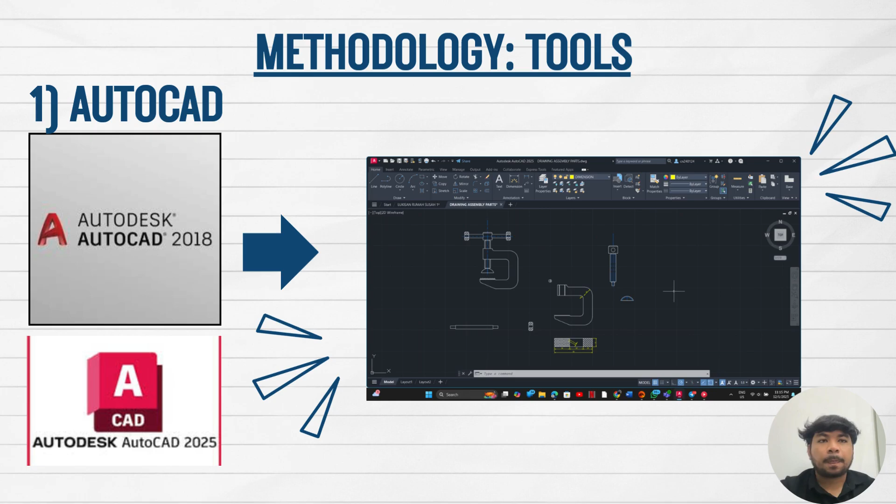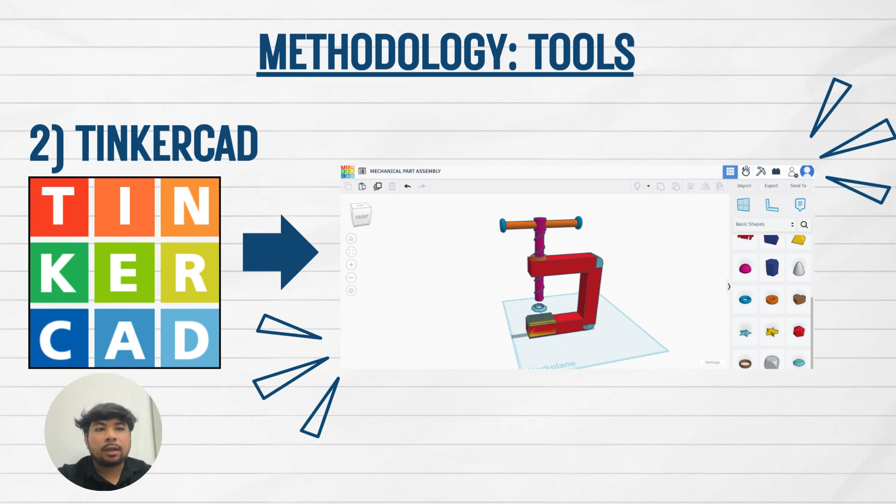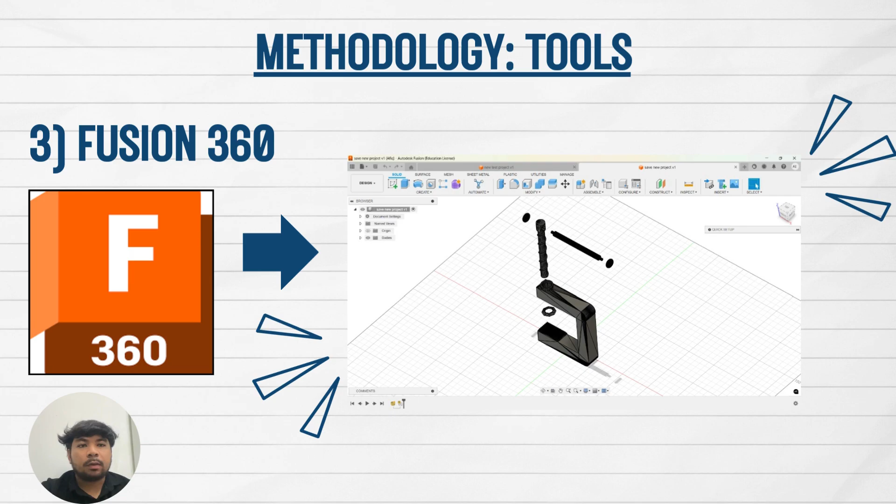Hi everyone, my name is Chan Eun Yong and my matrix number is AN240014. Now I'm going to talk about the components in our drawing.

First, the component is spacer. We used a quantity of two for this, and the material is steel NB 1020. First, we drew the 2D for the spacer and converted it into 3D, and this is much easier for us to convert because we did the 2D drawing first, then converted to 3D.

The function of the spacer is: first, alignment and separation; second, load distribution; third, smooth movement; fourth, prevention of over-tightening; fifth, compensation for manufacturing tolerance. Then for the orthographic drawing, we used third angle projection for this.

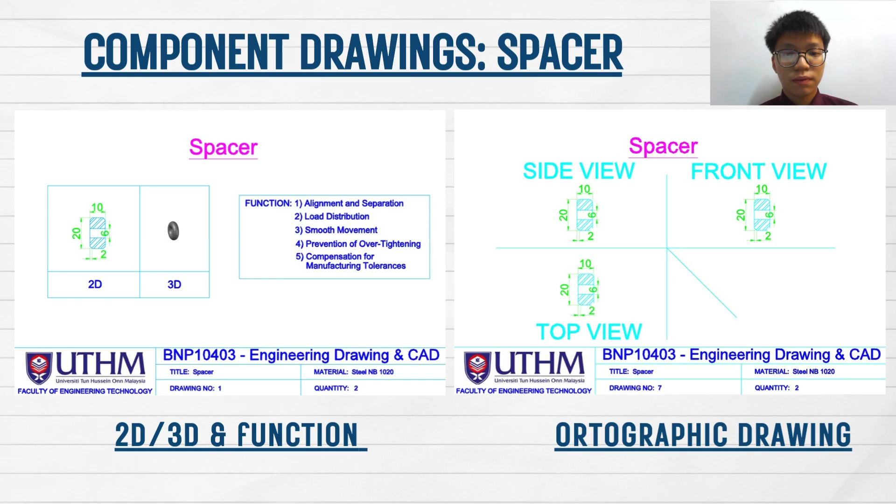The second component we used in our drawing is the handle. We used one quantity for this, and the material is steel NB 1020. We also drew 2D and 3D for this. First we drew the 2D, then it was easier for us to convert to 3D. The function of the handle is, first, operation control; second, mechanical advantage; third, adjustment; fourth, safety and ergonomics. For the orthographic drawing, we also used third angle for this.

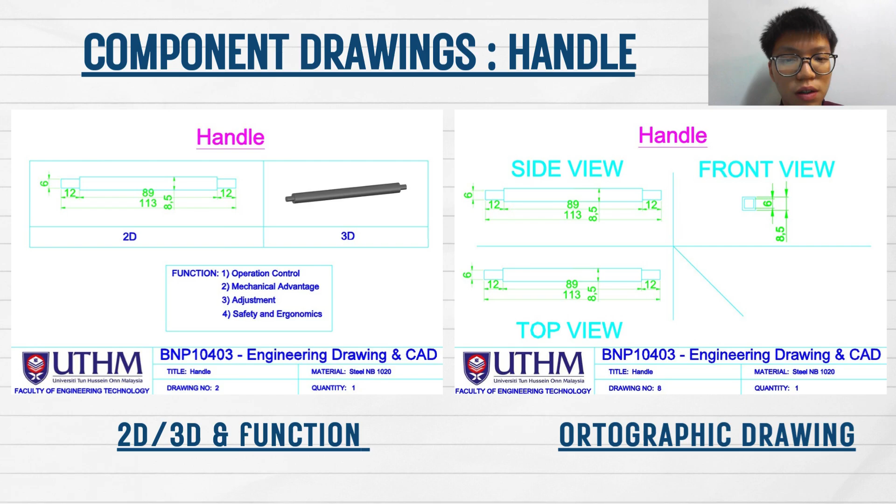The third component we used in our drawing is the screw. We used one quantity for this, and the material is steel NB 1020. First we drew the 2D picture of the screw, then we converted the 2D into 3D. The function of the screw is, first, clamping mechanism; second, force multiplication; third, precision adjustment; fourth, durability and strength; fifth, locking ability. For the orthographic drawing, we used third angle for this.

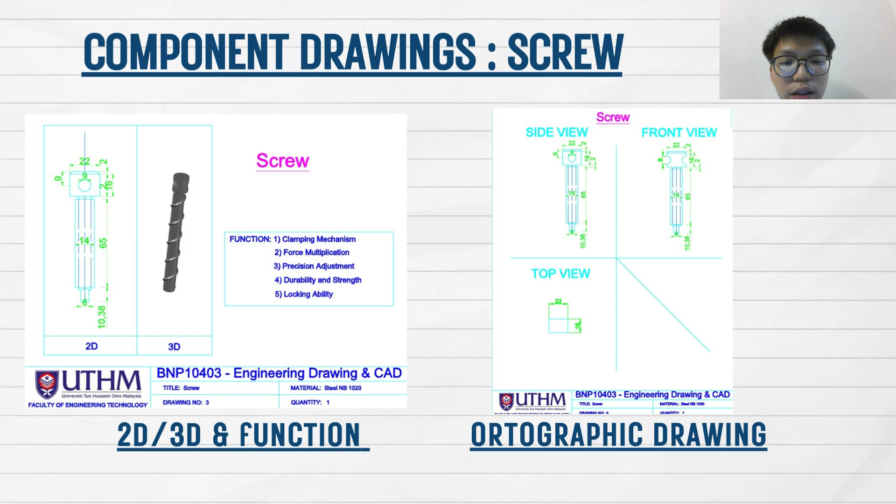The fourth component we use in our drawing is the body. We used one quantity of the body, and the material is forged steel NB 1020. We drew the 2D drawing of the body, and the 2D has two drawings in this: first is the main body, and the second one is the details. Then we converted this into the 3D drawing. The function of the body is, first, structural support; second, durability and strength; third, jaw alignment; fourth, mounting base; fifth, guidance for moving parts. For the orthographic drawing, we used third angle in this.

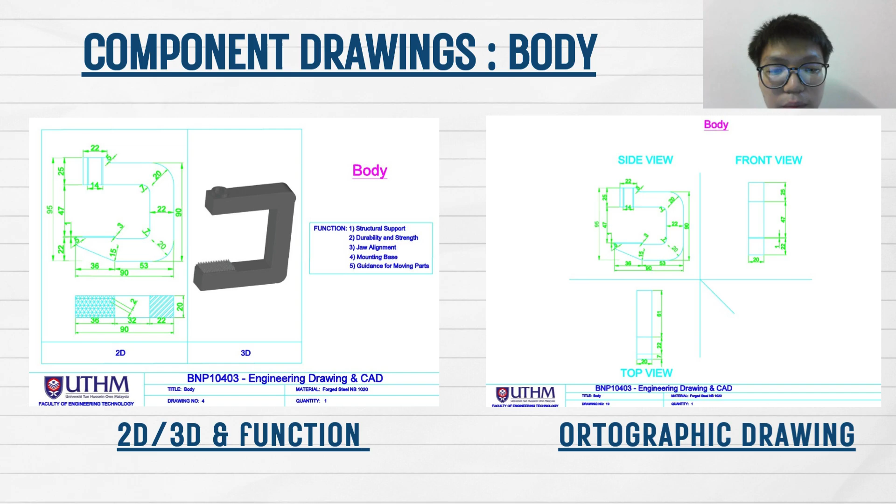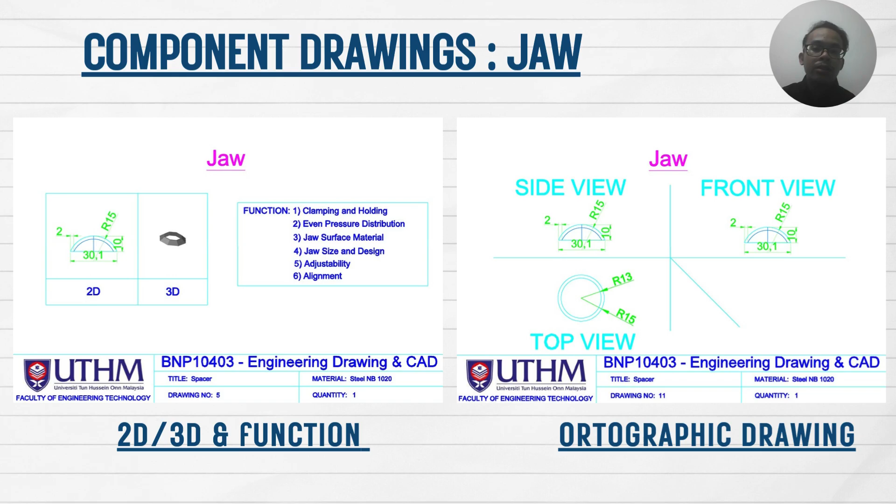For this part, I will explain a little bit about the jaw. There are a few functions for the jaw: first is clamping and holding items, next is even pressure distribution, alignment, and adjustability. Outside of it, we have an orthographic drawing that shows the view from front, side, and top of the components.

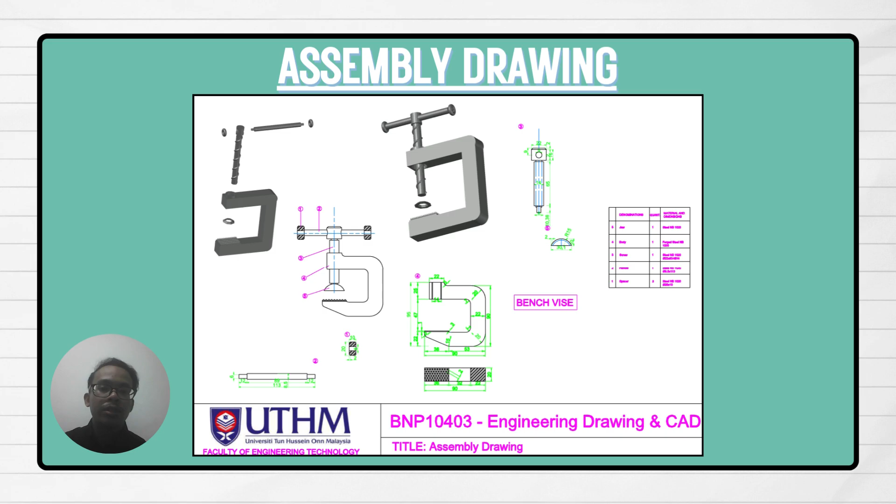So now we are at the bill of material part, or we call it the BOM part. In this section, we will list down all the quantities for each component that is in this section. First, we have the spacer. We have two spacers used on these items. The material for this spacer is steel NB1020 with dimension 20 by 10.

Next, we have the handle. The material for this handle is the same as the spacer, which is NB1020, with dimension of 8.6 by 113. We also have the screw and jaw, with quantity one only for each item. The dimension of the screw is 22 by 93. The material for the body is forged steel NB1020.

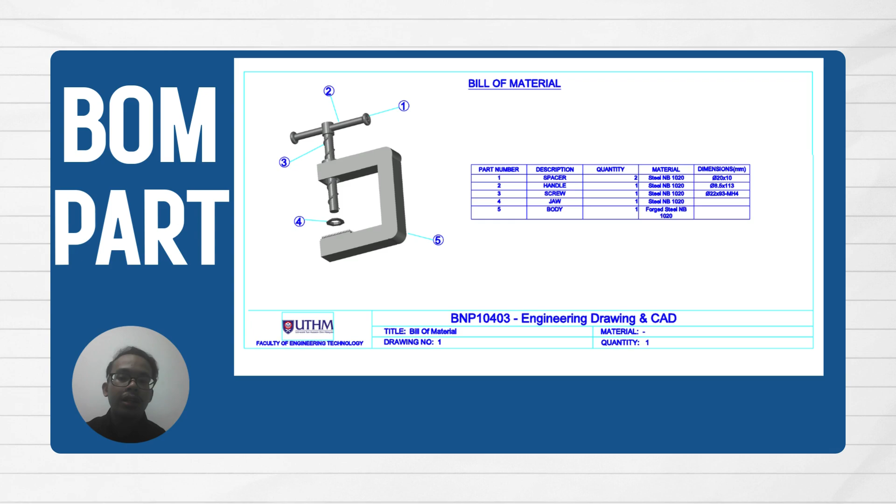Next, the challenges that we had during the project: the difficulties we encountered while working on the project. First, we dealt with intricate measurements and drawings that necessitate a high degree of precision and accuracy in the 3D construction of the project. Next, we encountered technical difficulties resulting from hardware and software limitations and computer specification constraints, which made it challenging to satisfy our needs in the drawing. After that, we had to make sure the drawings were realistic and appropriately reflected real world scale, because it was difficult to maintain appropriate scaling. Lastly, we had issues with AutoCAD layer organization since there were too many layers added, which caused confusion between old layers and new ones.